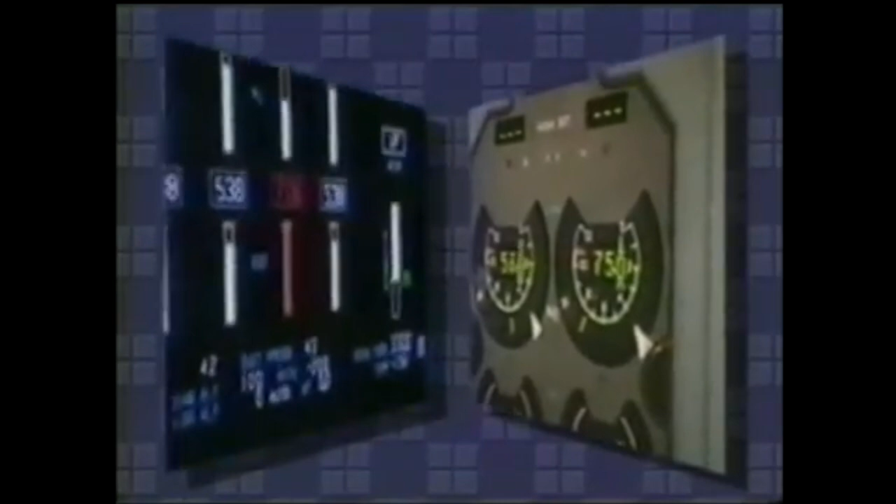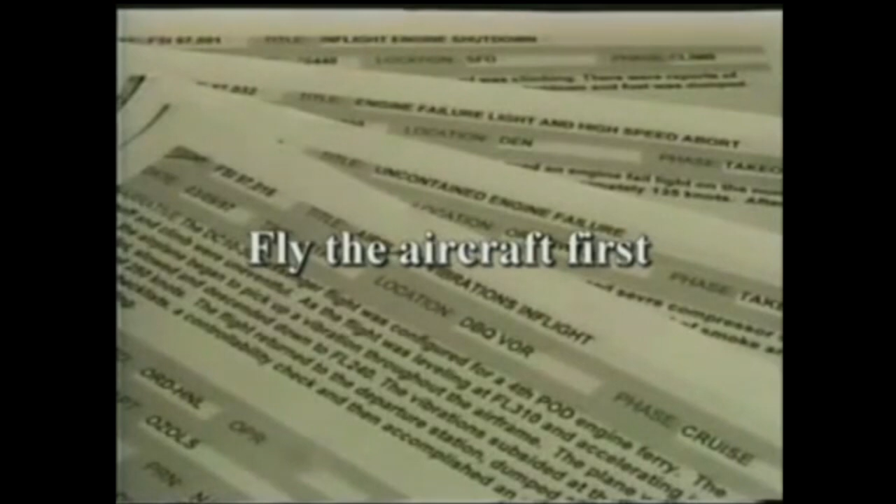Over the last several years, data has indicated some pilots have attempted to diagnose aircraft malfunctions prior to establishing control of the aircraft. This has occurred despite the fact that all pilots are taught to fly the aircraft first. So why does the data indicate that they have not done this? One of the main reasons is the startle factor. Because of modern aircraft's high reliability, when a malfunction occurs, it is frequently the first time the flight crew is exposed to the true sensations of that malfunction.

While simulators have greatly improved pilot training, they've not always realistically simulated the actual noise, vibration, and aerodynamic forces certain engine malfunctions cause. It also appears that the greater the physical sensations the pilot feels during the malfunction, the greater the startle factor. And the greater the likelihood the flight crew will try to diagnose the problem immediately instead of flying the aircraft first.

When flight crews are interviewed after engine malfunction events, such as the surge of a large high-bypass engine during initial climb-out, they make very similar comments regarding the event. Pilots will often report that it felt like a bomb went off, or that the aircraft was falling apart. Each time an event occurred, the sound and the feel of the event were different, and often much more intense than indicated by any training the crews had received.

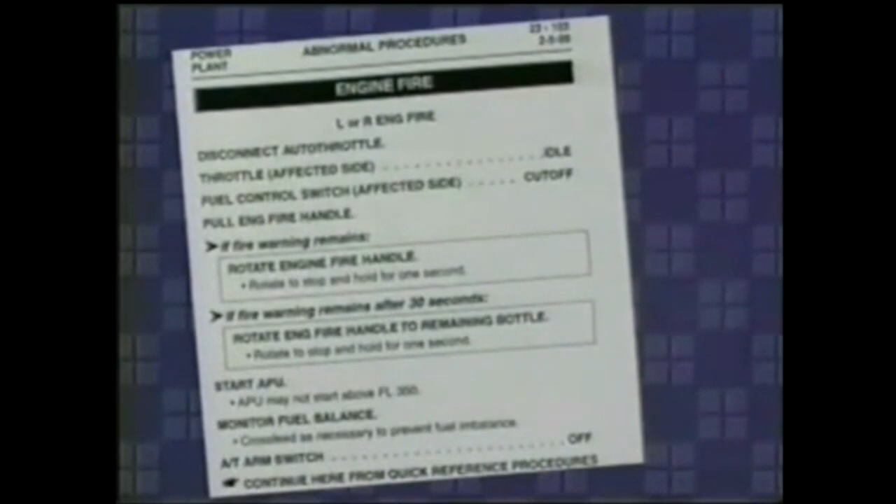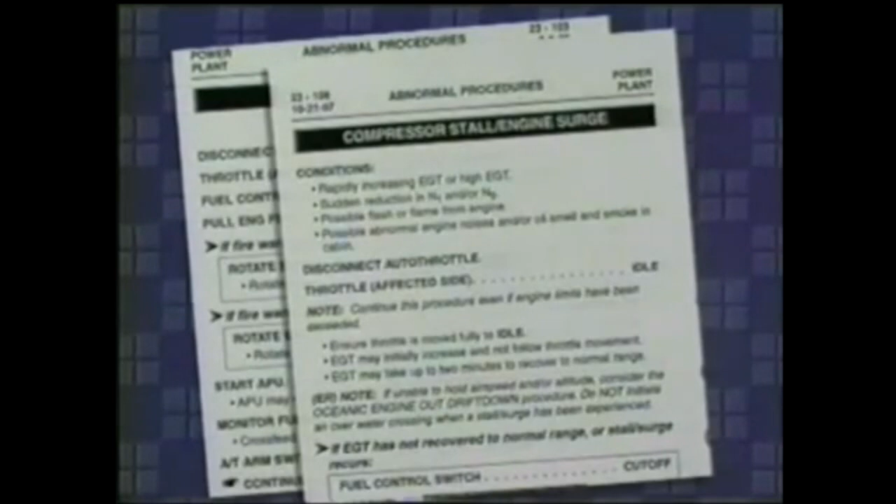Because of this, the flight crew either did not recognize the engine symptom or was so concerned about the engine that they responded without taking time to correctly evaluate the situation. In each case, additional time spent in stabilizing the airplane's flight path before responding to the engine symptom would have avoided a serious event.

Remember, all transport category aircraft are designed and certified to be controllable with the most critical engine failed. Unlike early turboprops, turbofan-powered airplanes do not require immediate pilot action to the engine in the event of a single engine malfunction or failure. Once the flight path is stabilized, the engine malfunction may be safely identified and the appropriate checklists executed. Taking the time to stabilize the flight path may sometimes lead to further engine damage, but despite that, the airplane still has the capability of safe flight.

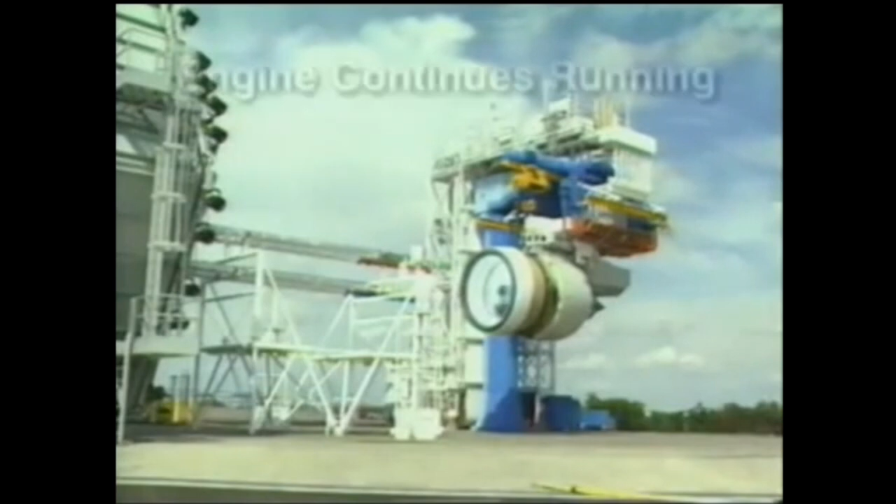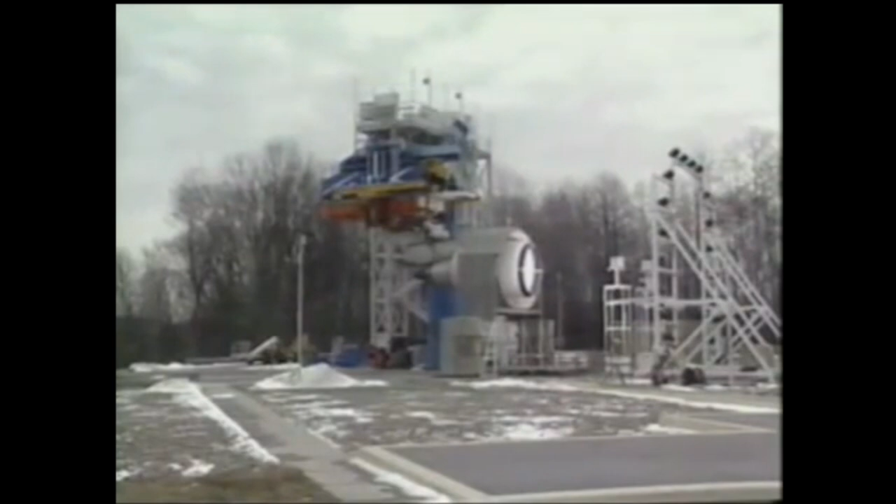Engines are tested during initial certification to demonstrate ruggedness following bird and ice ingestion. Even after a major failure, such as the loss of an entire fan blade, which is an extremely rare event, the engine shuts down safely and the airplane is still airworthy.

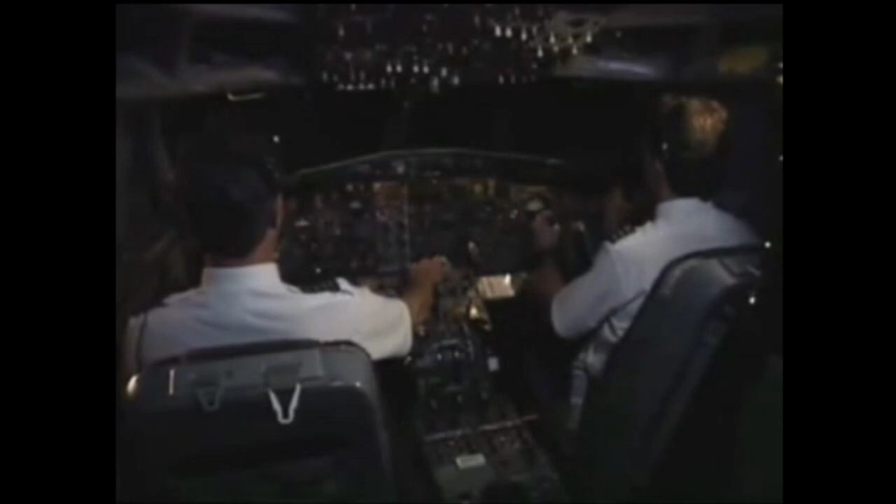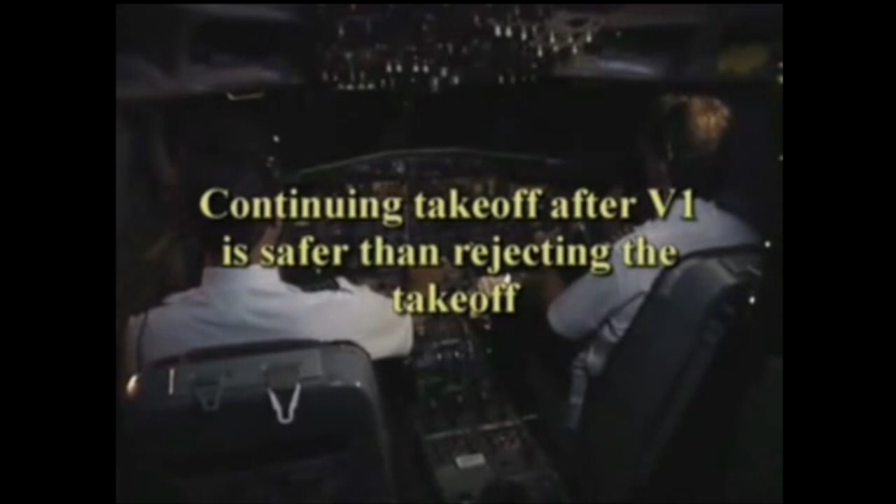Service history of fleet aircraft verifies that there are generally no engine failures requiring an instant engine shutdown in order to maintain airplane safety, and that continuing a takeoff after an engine failure at V1 is safer than rejecting the takeoff. So, the capability to recognize turbine engine malfunctions must be learned.

But how? The objective of this video is to provide pilots with information to help them recognize and identify various engine malfunctions that have led to inappropriate crew responses and accidents in the past. These malfunctions include fire warnings, tailpipe fires, bird strikes, vibration, engine surge, severe engine damage, and slow power loss.

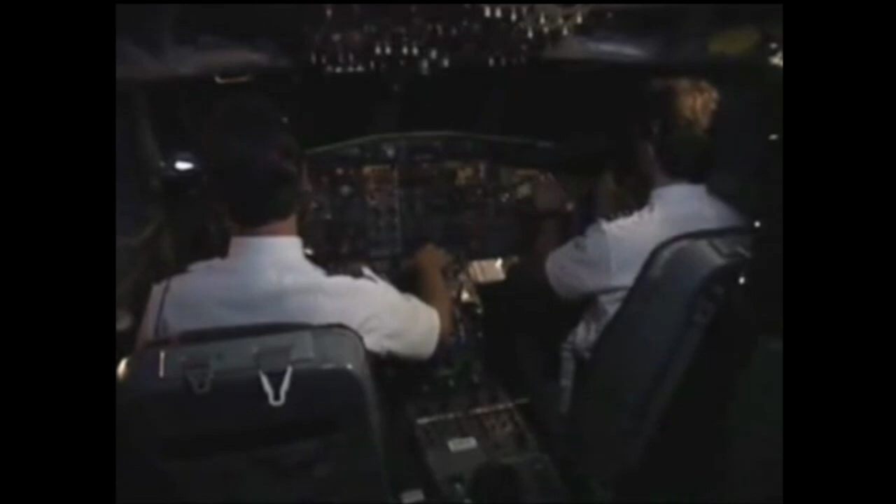In each case, the first priority is to employ the basic stick and rudder inputs necessary to maintain aerodynamic control of the aircraft. Remember, fly the airplane and then identify and respond to the engine malfunction when time permits.

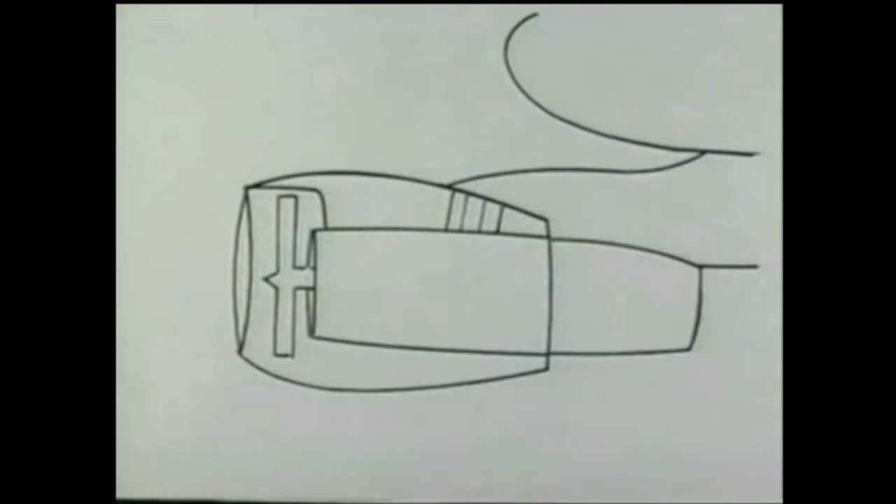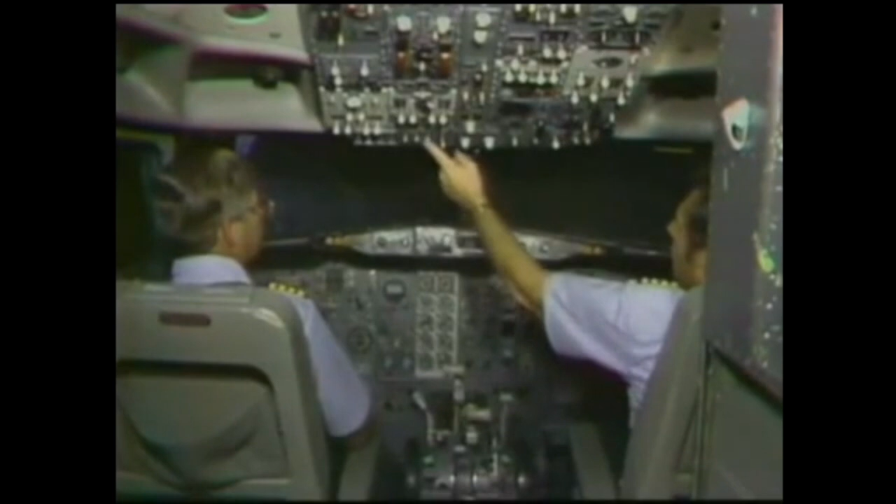Fire warnings result from excessively high temperature in the space between the engine casings and cowling or from fire detection system malfunctions. The heat source may be an actual fire around the engine, an engine failure allowing core air to escape through a hole in the casings, or a leak of hot air from a bleed duct. Whenever a fire warning occurs, the first priority must be to fly the airplane. Once the airplane is stabilized, attention should then be directed toward execution of the appropriate checklist.

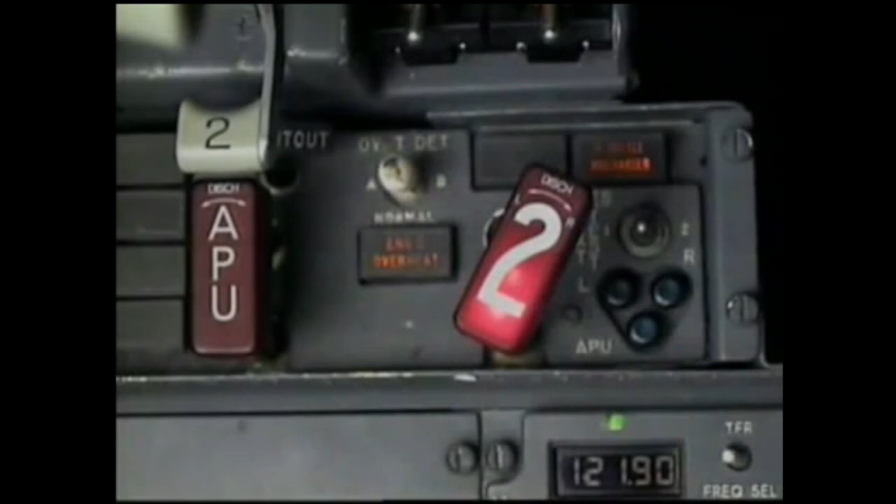Even if there is an actual fire, there is adequate isolation between the airplane structure and the nacelle to ensure sufficient time to establish and maintain airplane control to a safe altitude. Taking this time may cause further fire damage within the nacelle, but accident reports consistently show that flight path control must be focused on first, and it must remain a high priority until landing.

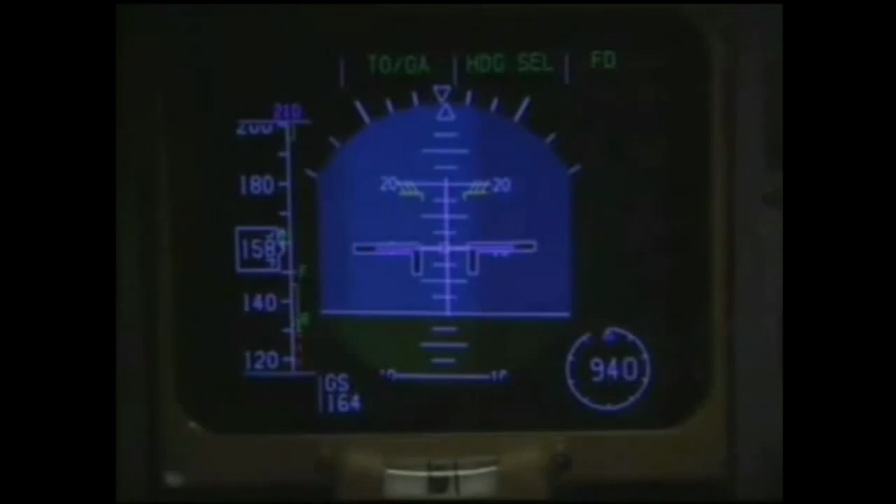Engine torching, or tailpipe fires, mostly occur during an abnormal engine start, but they may also occur after shutdown or during other ground operations. Although there may be no cockpit engine instrument indication, these events can be very spectacular when viewed from the ramp or cabin, and have been confused with an actual engine fire. The torching may be of short duration or it may last for several seconds. Note that the flame is confined to the tailpipe.

Flames may turn upward and threaten the wing if no airflow is maintained through the engine, and in some cases, an EGT increase may be indicated on the flight deck. Simply cutting fuel flow while continuing to motor the engine normally extinguishes the flames. The flight crew depends on ground personnel to identify engine torching.

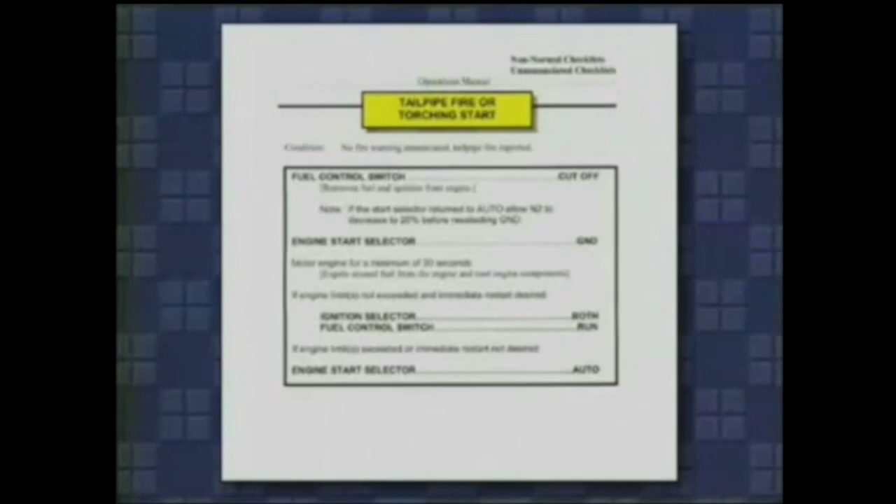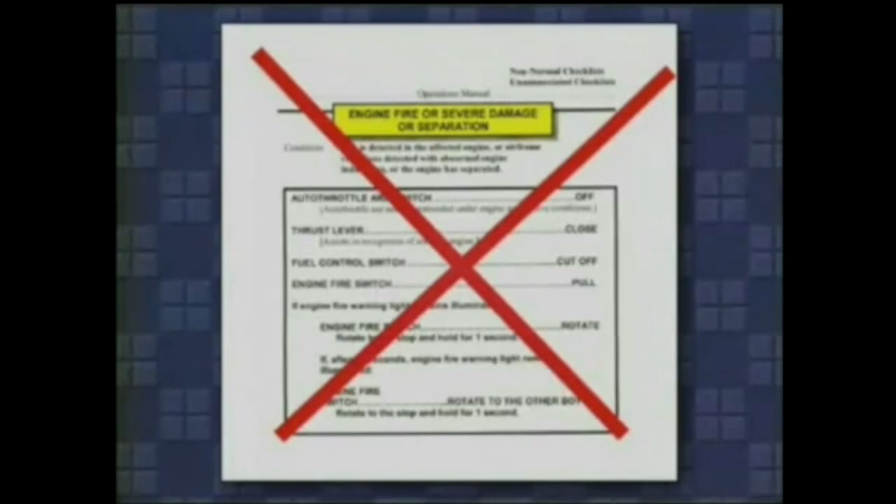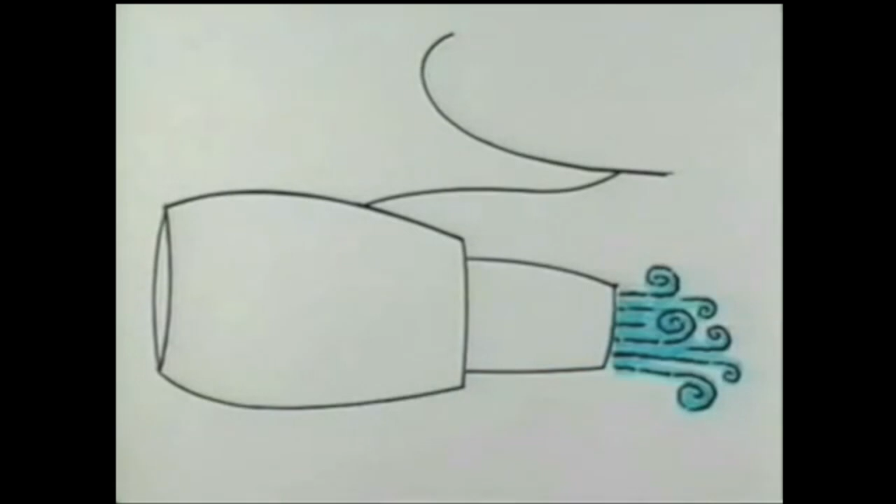If you are told of an engine fire without any flight deck indications of a fire, follow the engine torching procedure as outlined in your flight manual. This procedure will direct you to motor the engine and extinguish the flames. The regular fire procedure will not. Do not perform the engine fire procedure unless a fire warning indication occurs. Executing the regular fire procedure may disable bleed air to the engine starter and prevent you from being able to motor the engine to blow out the tailpipe fire.

There have been cases where flight attendants or passengers have initiated evacuations due to engine torching. These unnecessary evacuations can be minimized by prompt flight deck and cabin crew coordination to provide passengers with pertinent information and to alleviate their concerns.

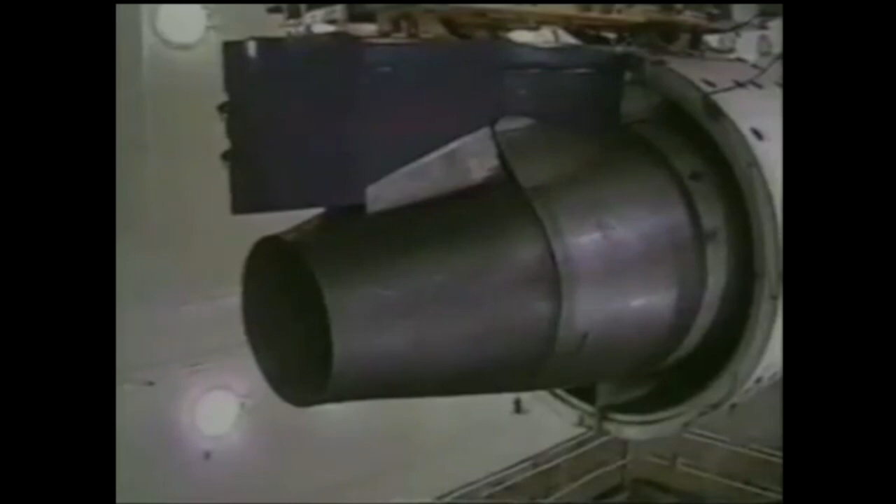Bird strike is a concern for every pilot. The birds may be observed by the flight crew, or the first indication of a bird ingestion may be an engine surge. Flocking birds are a particular concern since they can affect more than one engine. It may be difficult to see the birds and to know how many engines have ingested birds.

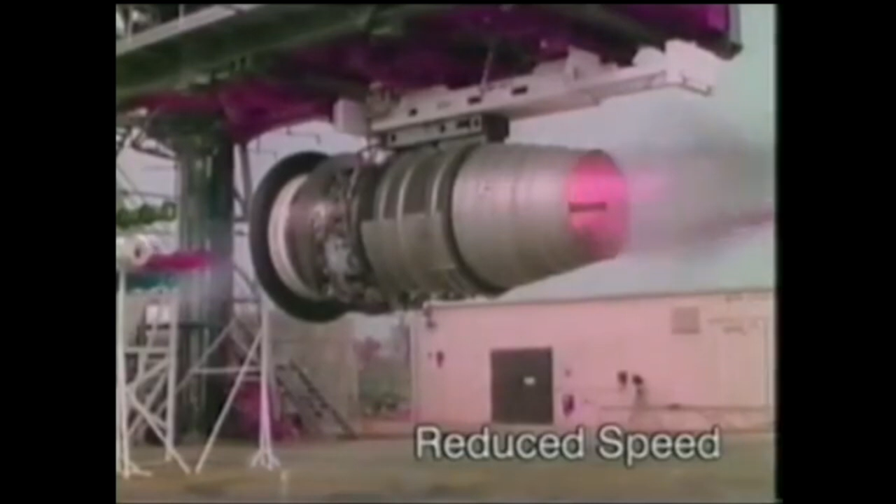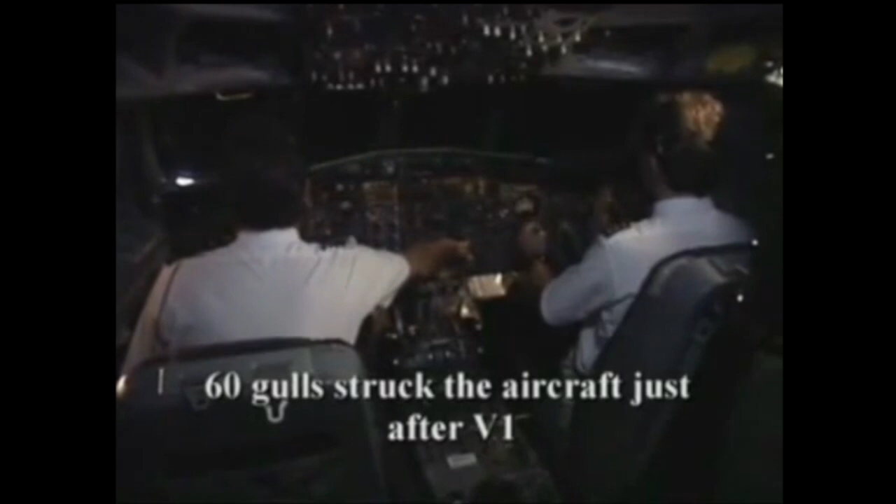V1, rotate. Birds. I check the birds. Come on, baby, keep flying. Keep going now. Keep flying. Positive rate. Yeah. Come on, baby, that's it. Nice job. Fly the airplane. There's 400 feet. Okay, what's the problem?

Most bird strikes occur close to the ground, at the very time when there is least opportunity to appraise the situation. Nevertheless, the record shows that establishing flight path control first before taking action on the engine is a more successful strategy than taking immediate action with the engine. There have been accidents resulting from bird strike-related rejected takeoffs above V1 speed, and in each case, the airplane was in fact safe to fly. Therefore, rejecting a takeoff due to a bird strike at speeds above V1 is not considered to be appropriate.

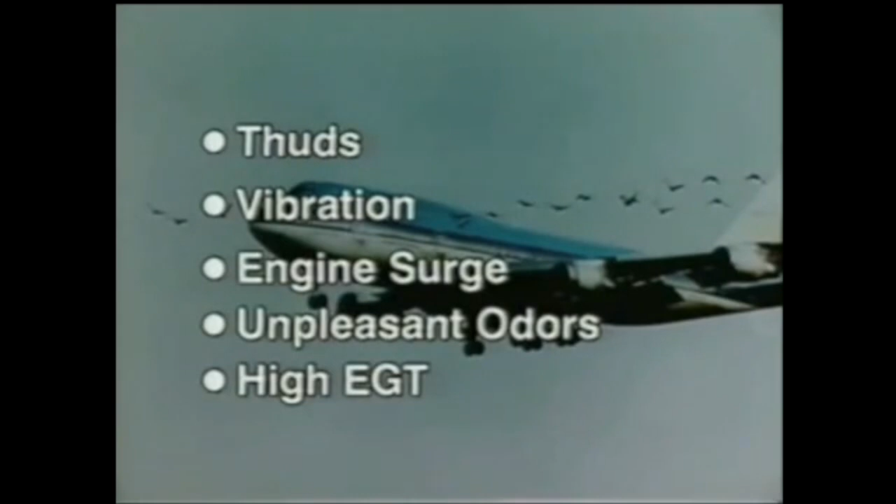Bird ingestion by an engine may be accompanied by audible thuds, vibration, engine surge, unpleasant odors, and abnormal engine instrument readings such as high EGT. Throttling back an engine may be needed to clear a stall after the airplane has been placed on a stable flight path. If the engine involved cannot be positively identified, do not shut it down. In the unlikely event of multiple engines surging, prompt action may be required to clear the stall on the engines one at a time, to assure that some power is available later.

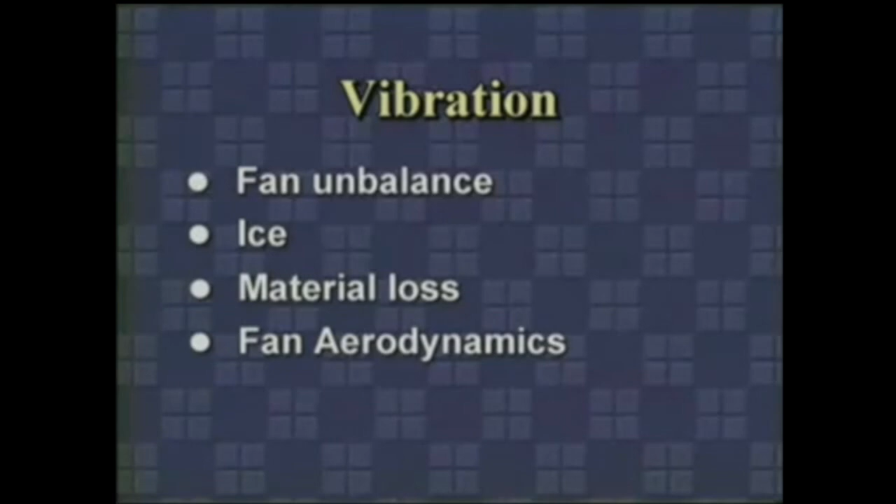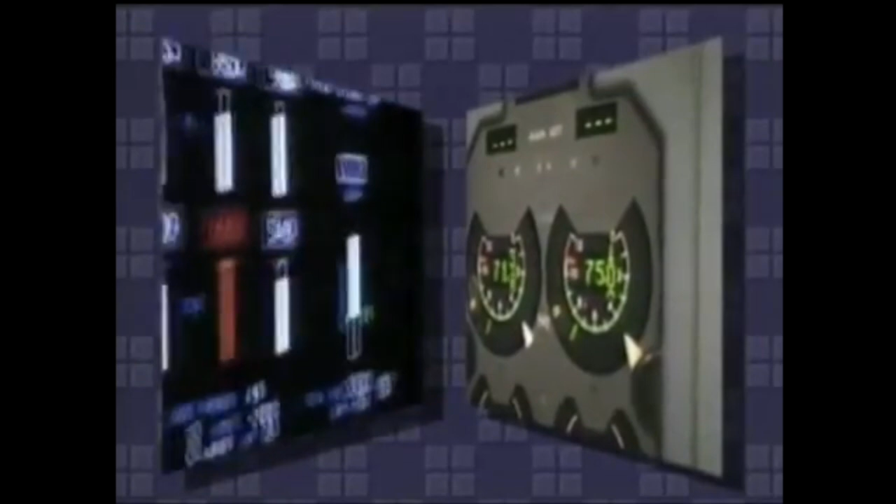Engine vibration may be caused by a fan unbalance. This can come from ice buildup. It may also come from fan blade material loss or aerodynamic excitation from blade distortion due to foreign object damage. Vibration can also come from internal engine failure such as a bearing failure. Cross-reference of all engine parameters will help to establish whether an engine failure actually exists. Engine-induced vibration felt on the flight deck may not be indicated on instruments.

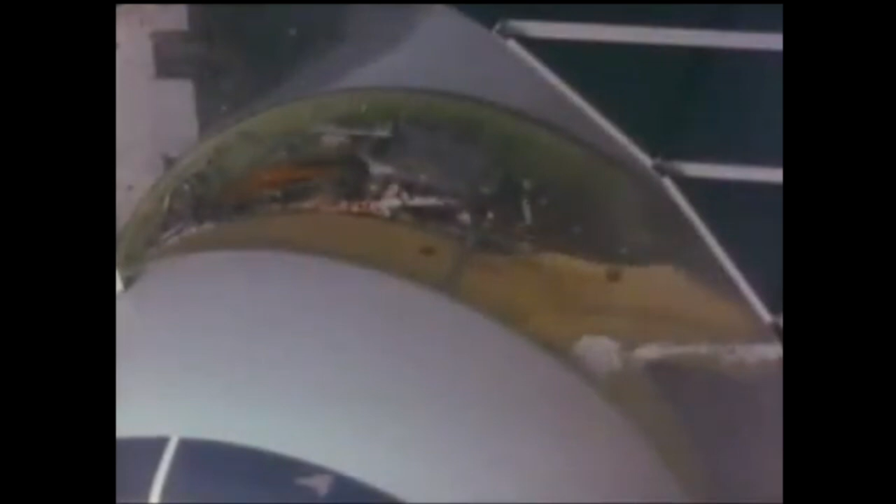For some engine failures, severe vibration may be experienced after the engine has been shut down to the point where instruments are difficult to read. This vibration is caused by the unbalanced fan, windmilling at an engine speed close to an airframe's natural frequency, which amplifies the vibration. Changing airspeed and/or altitude will change the fan windmill speed, and an airplane's speed may be found where there will be much less vibration. There is no risk of an airplane structural failure due to vibratory engine loads during this windmilling action.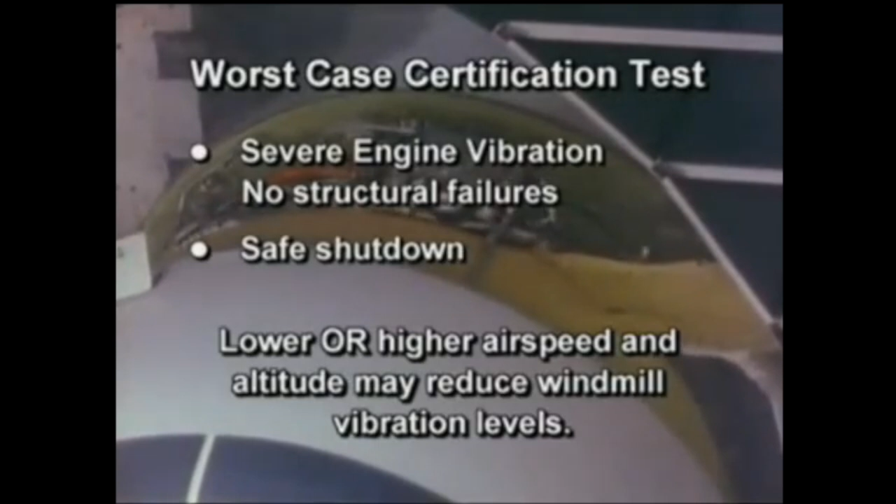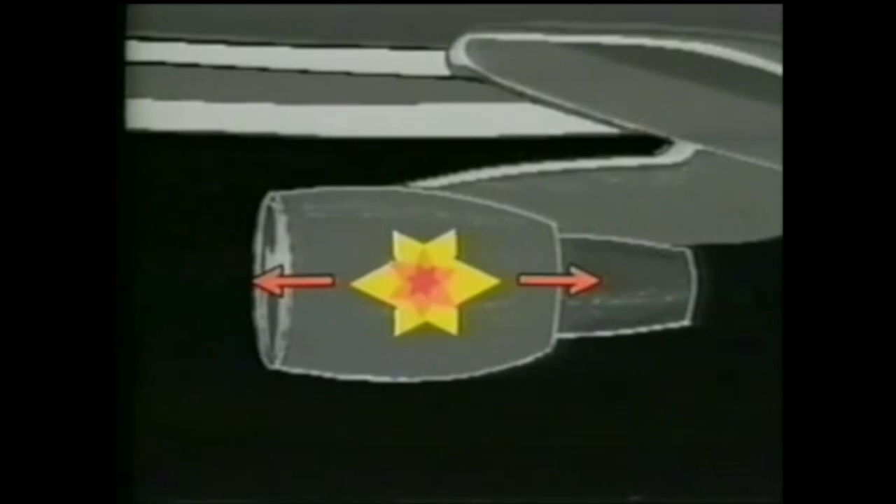From a flight crew member's perspective, one of the most startling events is the engine surge or stall on takeoff or during flight. An engine surge is, in the simplest terms, the breakdown of the airflow in a turbine engine. When the compressor blades stall, they are no longer able to force the air through the engine from front to rear. Now the high-pressure air in the middle of the engine can escape explosively from front and back simultaneously. Usually there are visible flames from both ends of the engine, accompanied with one or more very loud bangs.

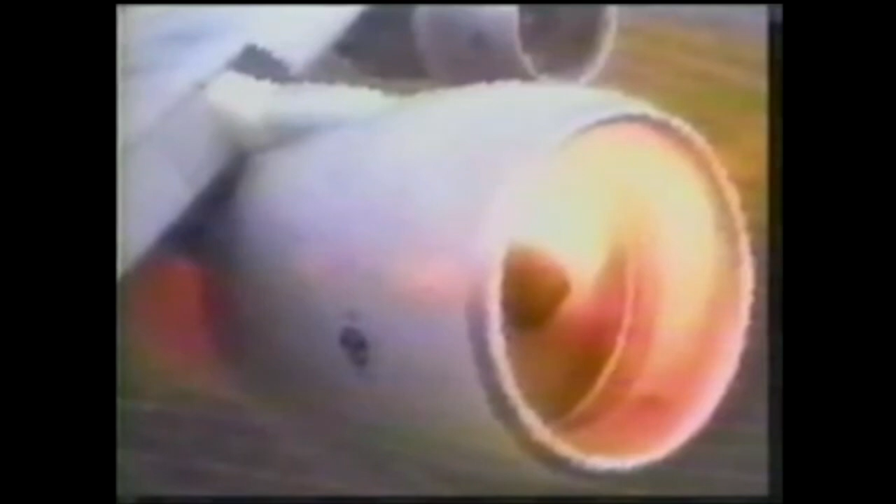This violent airflow reversal will produce an instant loss of thrust and an immediate yaw that will literally spill most of the coffee from your cup. This yaw is accompanied by a vibration that cannot be duplicated in the simulator. Bird strikes, internal engine failures, engine pneumatic bleed malfunctions, or internal engine clearance changes can cause a surge. It is usually a problem in the compressor system and so is often referred to as a compressor surge or

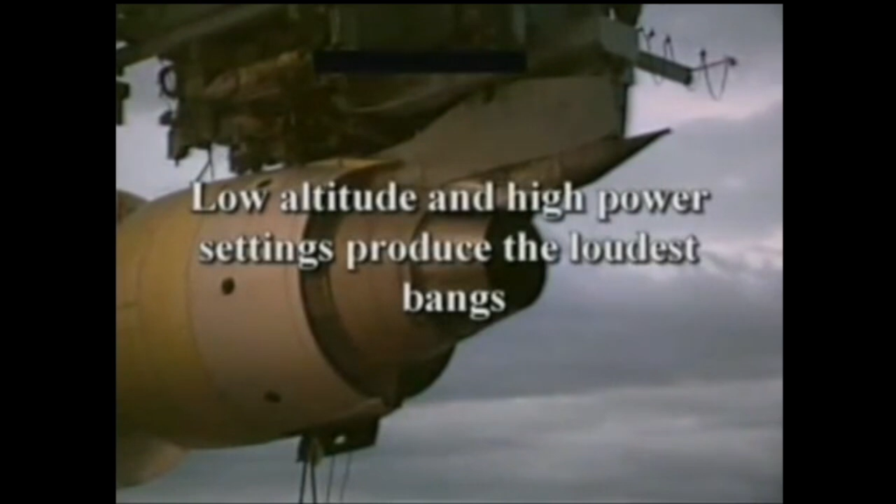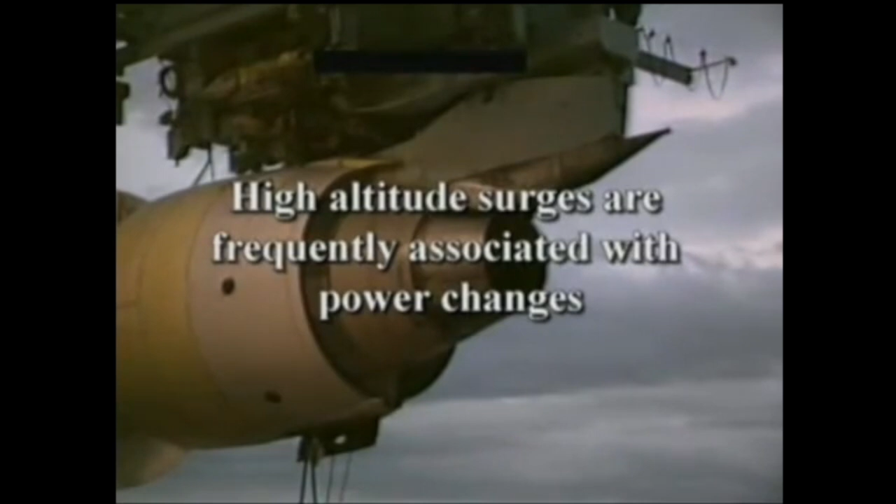compressor stall. The magnitude of the symptoms, such as the loudness of the noise and the severity of the vibration, vary with the power setting and the type of instability in the compression system. Low altitude and high power settings produce the loudest bangs and the most violent yaw and vibration. High altitude surges are frequently associated with engine power changes during leveling off or when initiating an altitude change. High altitude surges generally result in a muffled noise, light vibration, and increasing EGT, and may require power reduction to clear the condition. Some surges allow the engine to recover with no flight crew action.

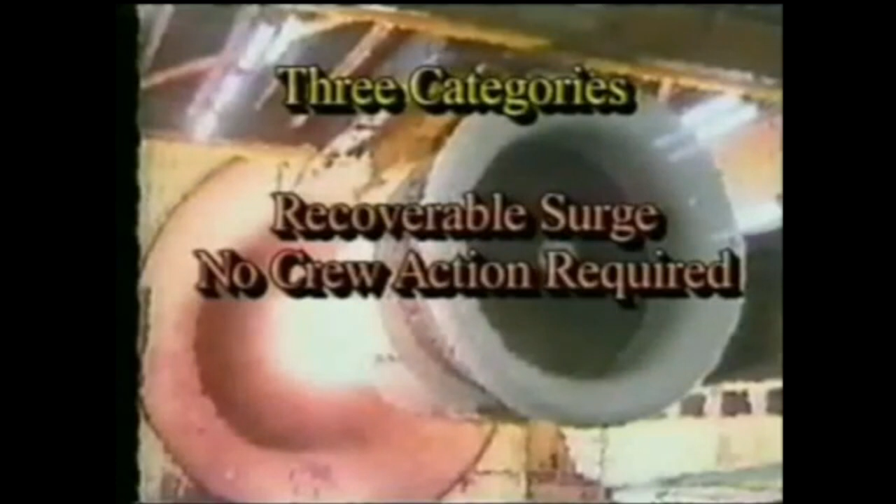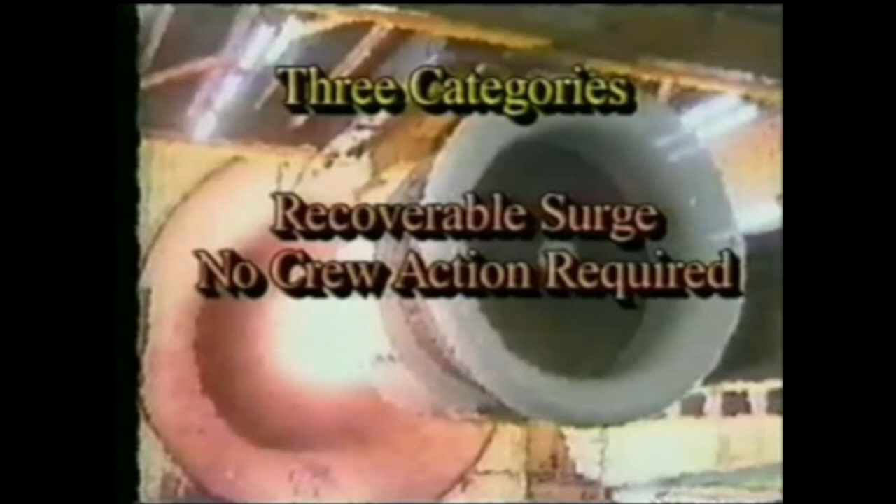Others recover after flight crew action to reduce power. The most severe surges are non-recoverable. When the engine recovers by itself, it is best to just fly the airplane and not interfere with the engine. Identification of a recoverable compressor surge or stall condition based on engine parameter fluctuations or changes alone can be difficult, due in part to the fact that the event is usually over in the blink of an eye. Generally, most flight crews identify the condition as an engine malfunction when the EGT exceeds its limits or the EGT

gauge turns red. If EGT continues to rise following a surge, the thrust lever should be retarded to allow the engine to recover. Then, after the engine recovers, power should be reapplied slowly. If the engine does not stall again when the power lever is re-advanced, the power can be left high. If the engine stalls again with the reapplication of power lever input, the power setting may need to be left at a lower power or idle condition. Continue to fly the airplane to ensure the indications return to normal.

If the engine does not recover or the EGT remains out of limits, then a shutdown of the engine may be the logical choice depending on the operational situation. Your flight manual and checklists identify the specific procedures to follow. Remember that an engine at idle still provides power for airplane systems and creates less drag than if shut down.

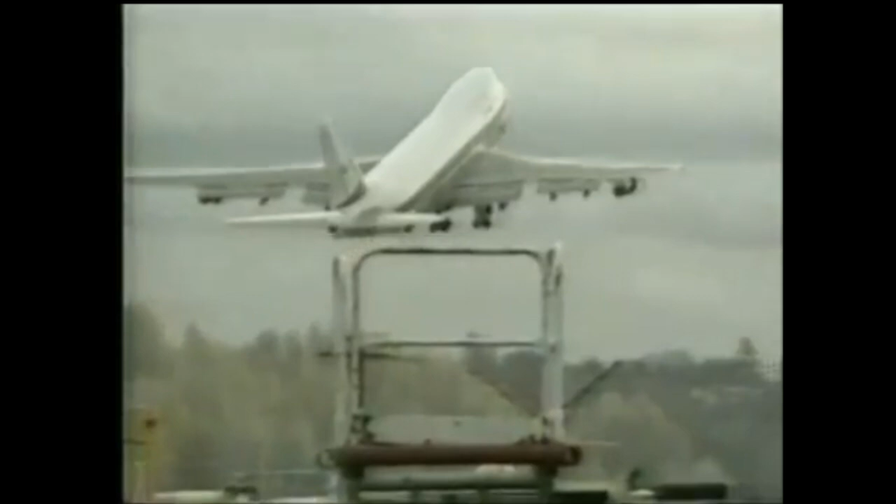There have been numerous occasions where a high-power compressor surge has occurred during the takeoff roll or initial climb-out, and the flight crew was notified by the tower that an engine was on fire. As a result, the flight crews accomplished the engine fire checklist and shut down the engine, even though there was no fire warning annunciated in the cockpit. The tower saw fire out the inlet and tailpipe, and their information regarding seeing flames outside the engine was correct. But an engine shutdown was not necessary since this was not actually an aircraft fire.

While the likelihood of high-power engine surge is rare, the startle factor associated with loud bangs and airplane vibration has led to instances of inappropriate action such as rejecting the takeoff after the V1 speed, shutting down the wrong engine, improperly executing the failure climb profile, or failing to comply with established ground tracks to clear rising terrain. Only take action to address the surge after stabilizing the flight path.

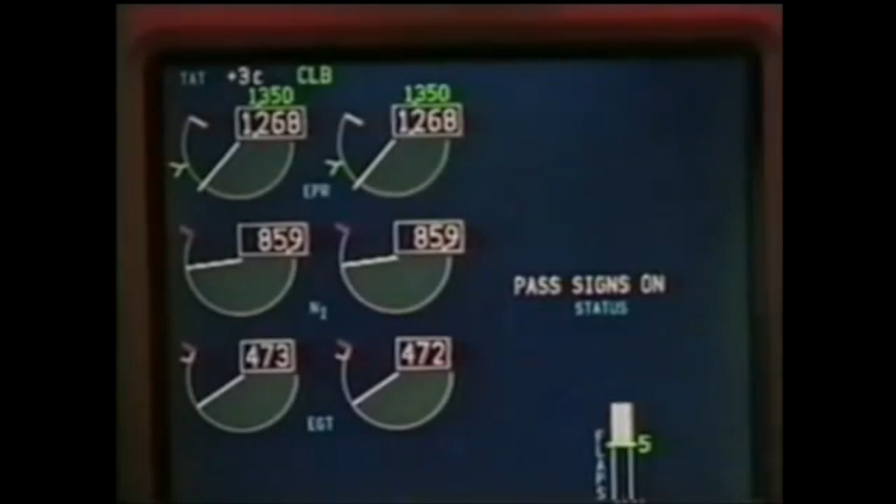Recent interviews with pilots who have experienced high-power compressor surge malfunctions during takeoff and initial climb have revealed that they have initially thought that a bomb had exploded, or that they hit a truck, or had a mid-air collision. Remember, no matter how loud the bang, airplane control is always the first priority.

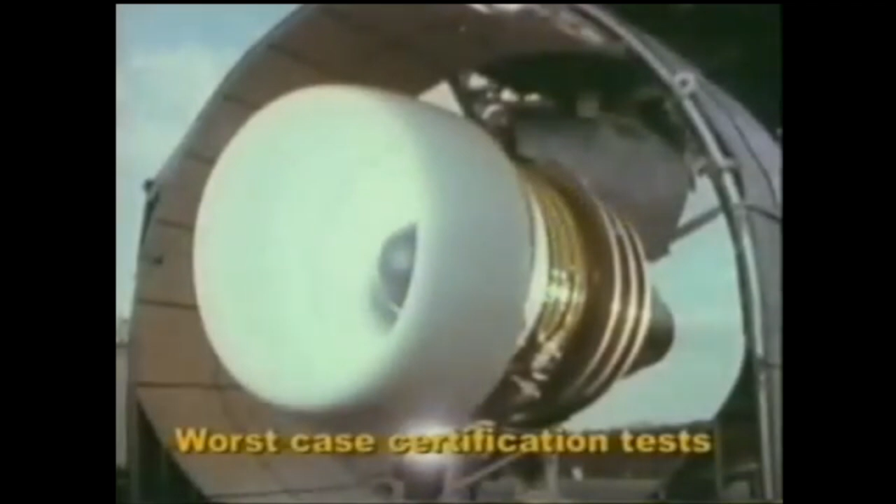In the event of a major internal engine failure resulting in severe engine damage, there may be a variety of symptoms on the flight deck: fire warnings, engine surge, vibration, high EGT, fluctuating RPM, oil system parameters out of limits, and thrust loss.

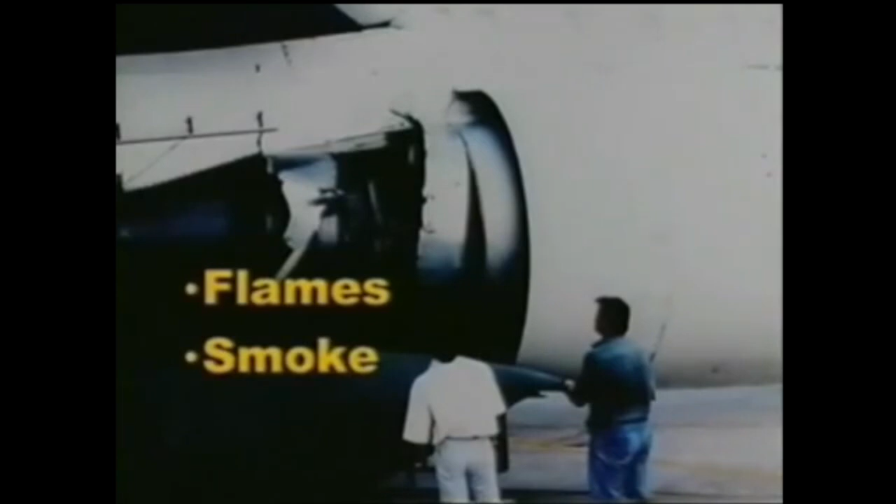Any one of these symptoms alone could be from a more benign malfunction, but multiple symptoms are a good indication of severe engine damage, and visual inspection by the cabin crew can be very helpful in confirming this. Visual symptoms may include flames, smoke, or visible damage to engine cowlings.

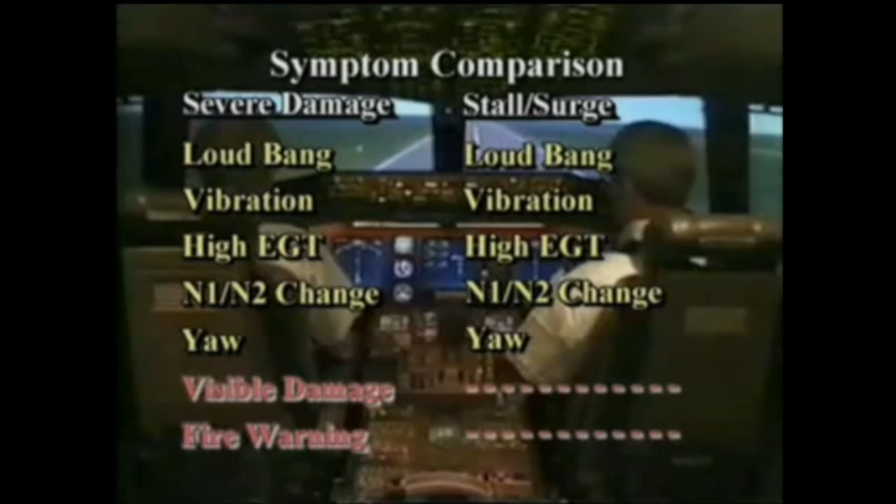It may not be possible to distinguish initially between an engine surge without damage and one accompanying severe damage. The symptoms of the two kinds of events can be very similar, and from an operational standpoint, it is not important to know immediately which of the two has occurred. If it does become necessary to shut down the engine, wait until you positively identify the engine you select as actually being the malfunctioning engine.

It should be noted that even an engine which may show signs of visible damage and visible flames may very well be producing useful power necessary for initial climb out. Again, the first priority is to fly the airplane, not the engine. After you have positive control of the aircraft's flight path, then identify and secure the affected engine when time permits. Diagnosis of exactly what caused the engine problem is neither necessary nor safe if it diverts resources from flying the airplane.

The malfunctions discussed so far have compelling cues, such as loud bangs, vibration, and warning or advisory messages. In each case, the challenge is to fly the airplane without being distracted by very compelling or alarming engine symptoms. The last type of malfunction to be discussed here is more subtle: slow decay of thrust, or non-response to power lever. These can be subtle to the point that it can be completely overlooked, with potentially serious consequences to the airplane. If an engine slowly reduces power, or when the thrust lever is moved the engine does not respond, then the airplane will experience asymmetric thrust.

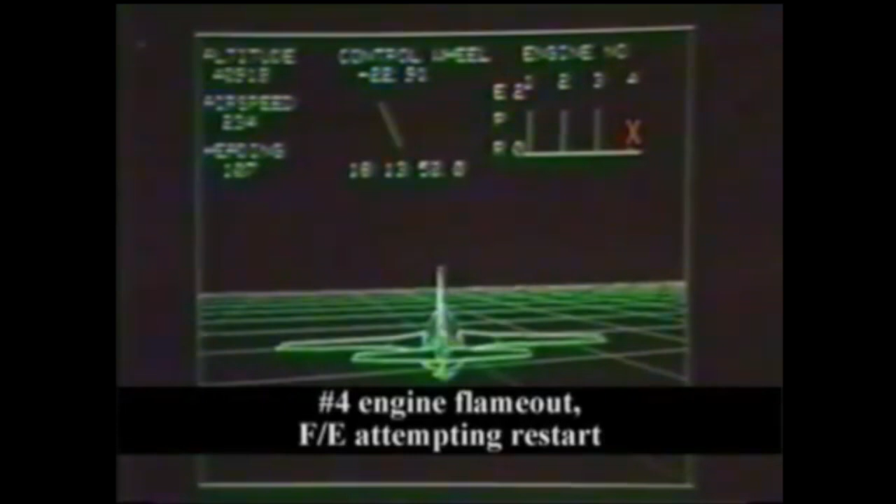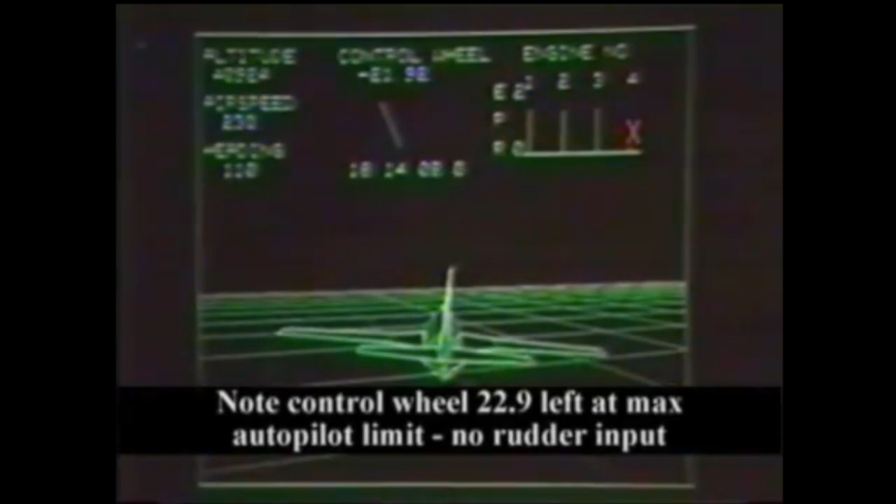The problems will most likely develop at a point during the flight when the autopilot is engaged. The autopilot will compensate for the asymmetrical thrust on its own. It takes an alert flight crew to recognize the situation that's developing. If the airplane is badly mistrimmed when the autopilot is manually disconnected, or when the autopilot reaches the limits of its authority and automatically disconnects, only seconds remain before an unusual attitude is encountered.

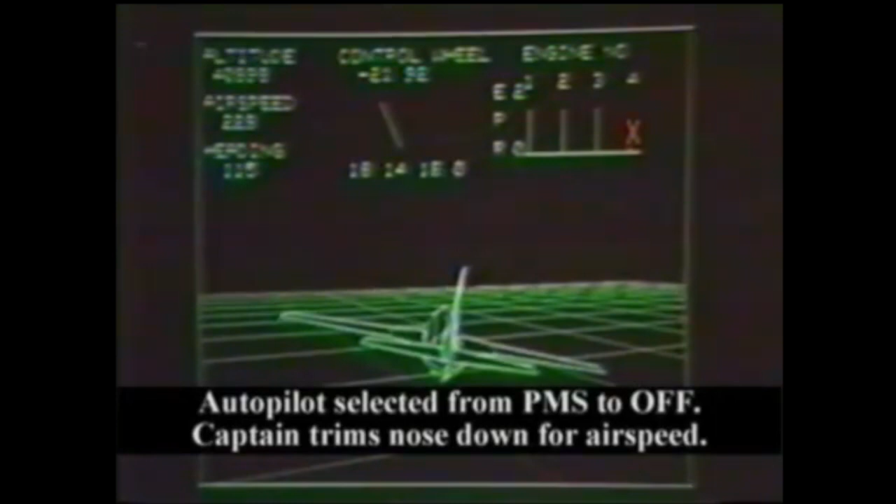If no external visual references are available, such as flying over the water at night or in IMC, the likelihood of an upset increases. This condition of low-power engine loss with the autopilot on has caused several aircraft upsets, which were not always recoverable. Flight control displacement or trim input indicators may be the only obvious indication that the autopilot is trimming the aircraft away from coordinated flight. Vigilance is required to detect these stealthy engine malfunctions and to maintain a safe flight attitude while the situation is still recoverable. But a slowly changing asymmetric thrust problem is not an easy one to detect.

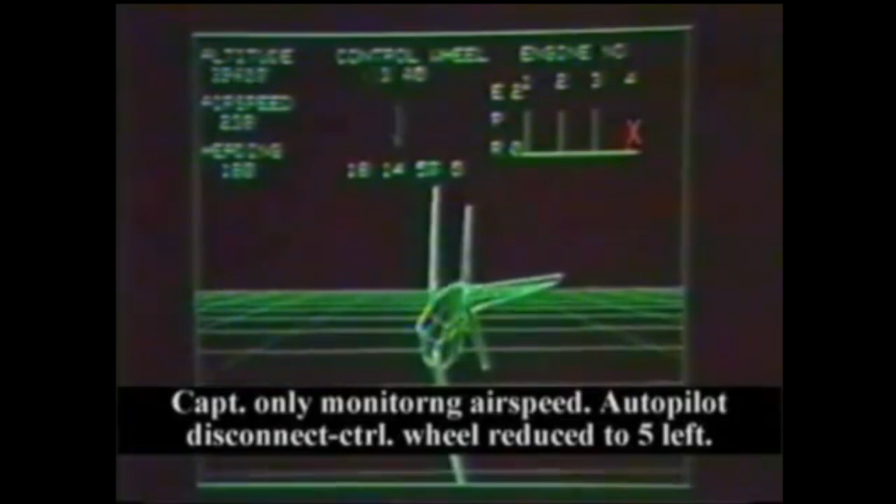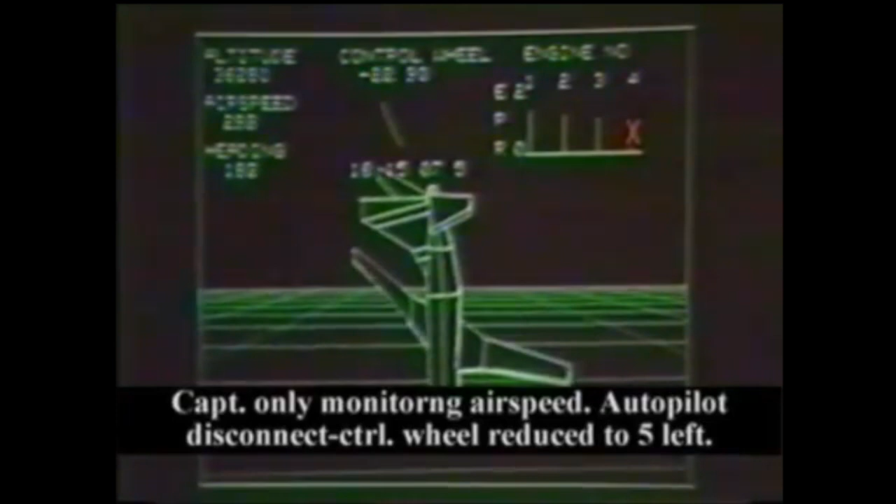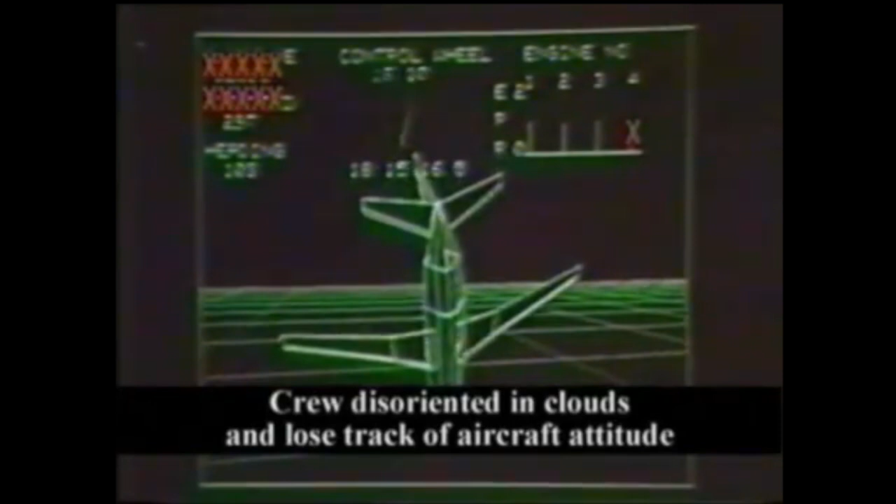Symptoms may include multiple system problems such as generators dropping offline, low engine oil pressure, unexplained airplane attitude changes, and significant differences between primary parameters from one engine to the next. If asymmetric thrust is suspected, the pilot must be prepared to make immediate rudder or trim inputs to avoid an uncommanded aircraft roll. The first response must be to make the appropriate rudder input or trim adjustment. Disconnecting the autopilot without appropriate control input or trim adjustments may result in a rapid roll maneuver.

Different aircraft from different airframe manufacturers display different types of indicators to the pilot regarding the amount of trim the autopilot may be adding to the system. Consult your flight manual and training department to gain a full understanding of how your particular aircraft provides visual, audible, or tactile indications of the amount of trim being added by the autopilot.

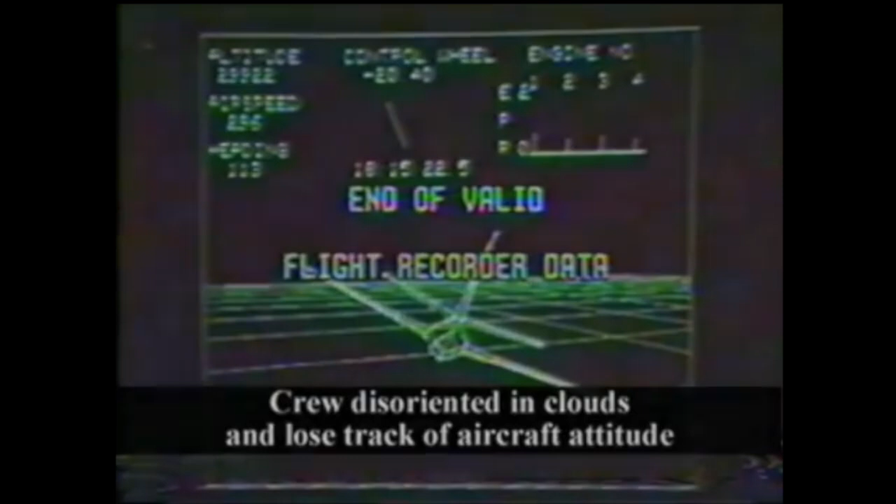The sequence of events and severity of symptoms experienced during an engine malfunction may vary from the events shown in this video and from those experienced in a simulator. Engine malfunctions vary from one event to the next. The failures shown here were selected as relatively severe, but not the most severe that have ever occurred. Simulation of failures may be limited by simulator capability, which may not permit realistic levels of noise and vibration symptoms. Industry is currently addressing these concerns to enhance the simulation realism for such failures.

This video is intended to provide general information on the characteristics of some high bypass engine failures and malfunctions. It is not intended to be an in-depth study of all possible engine failure modes. Specific remedial action to be taken in the event of an engine failure is published in the Airplane Flight or Operating Manual.